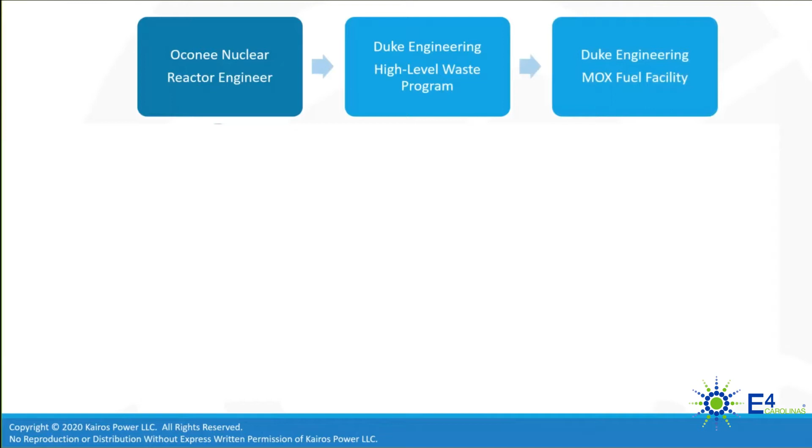Also within Duke Engineering, I then moved into another leadership position supporting the mixed oxide fuel fabrication facility back in Charlotte. Before being pulled back into the power company proper to do new plant development, I broadened beyond simply a Duke leadership role to an industry consortium as well, the NuStart consortium that was a collection of utilities working on jointly licensing the AP1000 and the ESBWR.

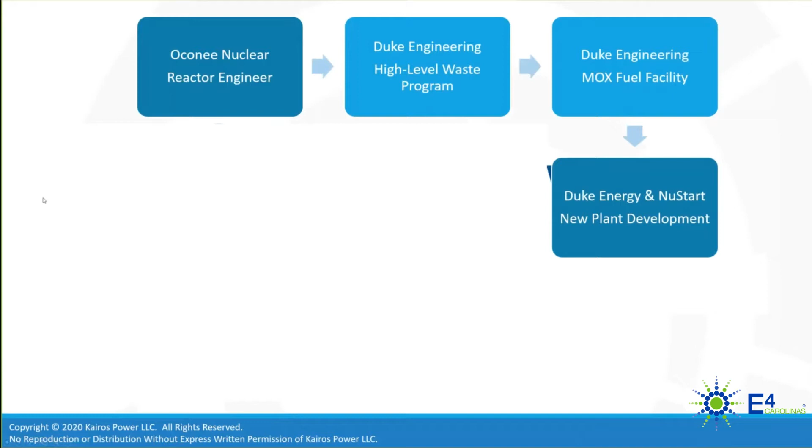After almost 30 years, I left Duke and joined Babcock & Wilcox on the mPower small modular reactor program. After B&W canceled that project, I spent 3 years in my own firm contracting with multiple advanced reactor interests. Happily, one of those clients made me an offer I couldn't refuse, and here I am.

As I reflect on my path, I look back on the combination of events that got me where I am. There were certainly components of being at the right place at the right time. Certainly there were components of being willing to stretch beyond what might have been my obvious capabilities, obvious either to myself or to others or both. And the willingness to step into leadership roles in partnership, consortium, or industry forums.

As those who have been in those sort of industry forums can attest to, there's a lot of value to just being willing to speak up, especially in a room full of people when otherwise things might be quiet on critical issues.

So on to the main presentation content. Kairos Power is a privately funded company focused on the commercialization of the fluoride salt-cooled high-temperature reactor, or FHR. We'll talk about our technology in a moment. We were founded in the San Francisco Bay Area in 2016, emerging from a concept developed at UC Berkeley with cooperation from MIT, University of Wisconsin at Madison, and the Department of Energy's Integrated Research Program.

We're currently at about 140 full-time employees, most of whom work out of our Alameda, California headquarters that you see pictured here, with a handful in the Charlotte office and a few in our new and growing Albuquerque location. Our development schedule is driven by an expectation of US demonstration by 2030 or earlier, with an emphasis on earlier, and rapid deployment ramp in the 2030s.

Our design is a bit of a hybrid. So we combine the use of TRISO fuel, which is historically used in high temperature gas reactors, with molten salt coolant, borrowed from the molten salt reactor designs, but distinct from them in that our fuel is not dissolved in the coolant. We're actually unique in having molten salt as a coolant, but a solid TRISO fuel. And not pictured here, but borrowed from sodium fast reactor technology, is a low pressure primary system.

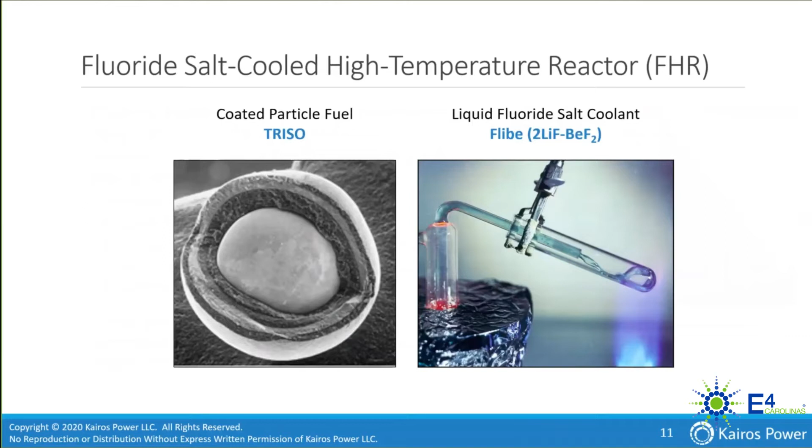Our commercialization target relies on competing with natural gas. We recognize we will have to do things differently, as do all new nuclear developers today. We start that by taking advantage of robust inherent safety that includes substantial fuel temperature margins as a result of the very robust TRISO fuel, retention of fission products in the fuel and in the coolant. One of the important aspects of the molten salt coolant is it has a very high affinity for hanging on to radionuclides.

So the fuel form that we use is remarkably robust. It's been tested to temperatures in excess of 1500 degrees centigrade. So there are hundreds of degrees of margin against any projected accident scenario.

In the unlikely event of release of significant radionuclide content from the fuel itself, we take advantage of that high affinity on the part of the molten salt to grab onto those radioisotopes and to hang on to them. And as I mentioned earlier, a low pressure primary system that limits the volatilization component of a hypothetical accident scenario.

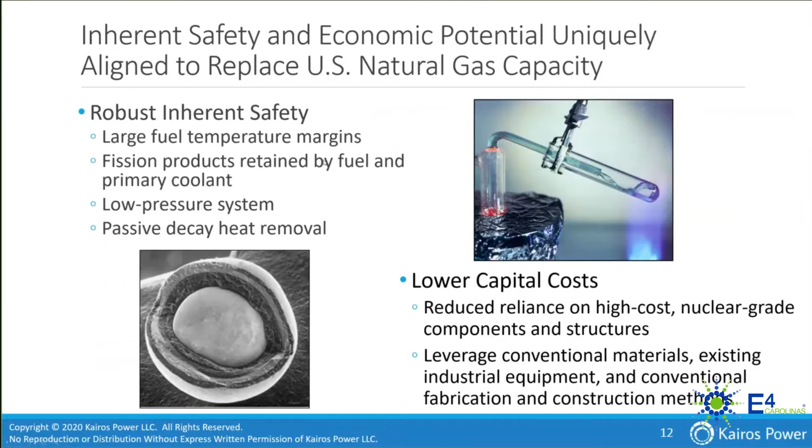Another innovation on the part of Kairos Power is to challenge the conventional development cycle with more iterative development that incorporates the concept of rapid development and testing cycles, often testing to failure as part of prototype development. I'll show you a picture at the end of the presentation that's actually one of our labs where most of our design engineers are co-located with a lab facility. And when it comes time to conceptualize a component, more often than not, they simply go into the lab and build what they're designing in real time to see if it will work.

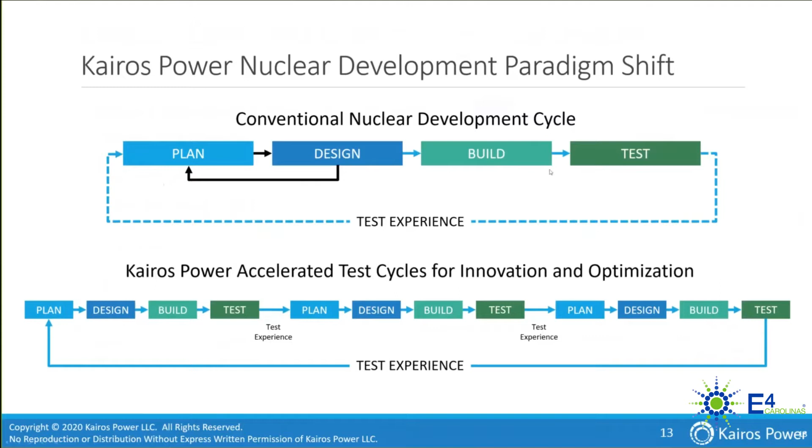I meant to mention at the time, it's a repurposed World War II era hangar on the former Alameda Naval Air Station, which is being repurposed for several industrial and residential purposes. It is a singularly impressive facility. If you ever get the chance to see it, you should definitely go do that. It's roughly 50 or 60,000 square feet of laboratory and office space, and it's a really, really slick place to visit.

The second is the Salt Lab, which is intended to handle molten salt at temperature. The S Lab is also co-located with the Alameda headquarters facility, and it is being completed and commissioned as we speak. We have managed to return a select number of people to work in our Alameda facility, and their primary focus, of course, while maintaining safe operations, is to get the S Lab commissioned.

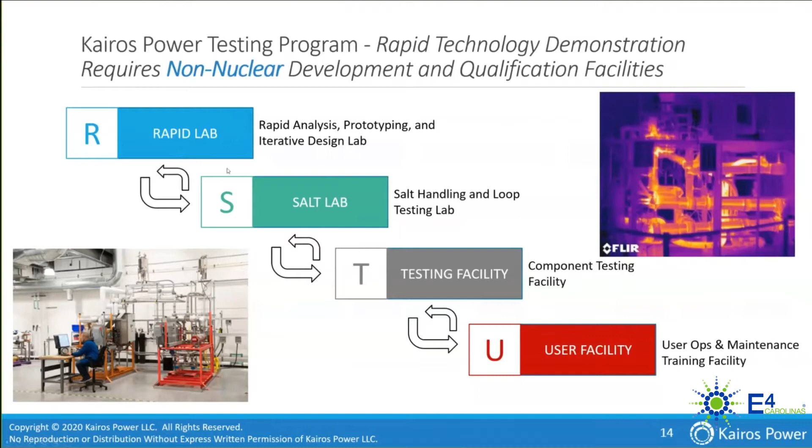In the past 2 years, in addition to commissioning the Rapid Lab and the Salt Lab, we've completed pre-conceptual design of the Kairos reactor and are well underway on conceptual design. We're also in the midst of detailed design for the engineering test unit that I mentioned a moment ago. I run the East Coast office in Charlotte, and I'm happy to report we just announced the formation of a strategic collaboration with Materion Corporation to develop a reliable and cost-effective supply of salt coolant for high-temperature molten salt reactors.

This coolant that we talked about a moment ago is a key component of the Kairos Power design, and under the agreement with Materion, they will supply beryllium fluoride, as well as expert technical consultation, key interfaces, and support services, and we're really happy to be working with them.

Also, I mentioned the new Albuquerque facility for the location of the engineering test unit and the T facility. We took over that facility. It's an existing building that we'll be upfitting, as well as adding some additional facilities ourselves. Just a few months ago, that announcement was made right at the end of the last calendar year.

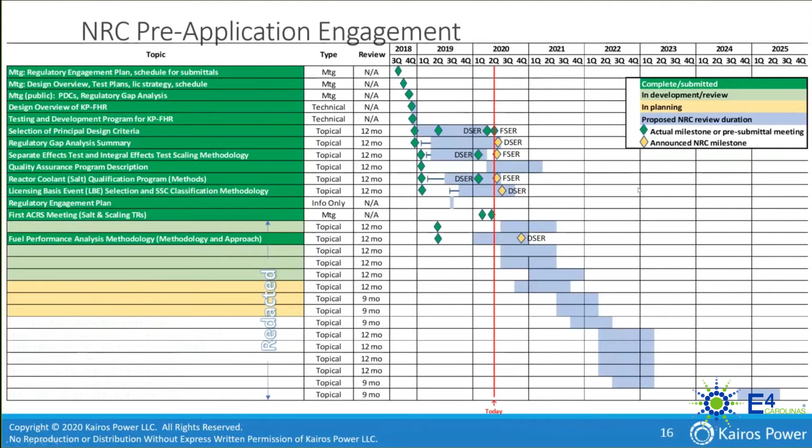So for those that aren't well versed in the work that's been underway in advanced reactor development in the past couple of years, I want to touch on some additional reasons for optimism. Small modular reactors have the potential to change the way nuclear energy is deployed in this country. Passive safety, which is pretty much the price of admission to new reactor development these days, changes the paradigm about what's considered important to safety.

Extended accident progression times, which I mentioned earlier, similarly have the potential to help change the outcome in our insistence on focusing on worst case scenarios. That is, what we think of as worst case is now changing and becoming more realistic and becoming more focused on the actual design as opposed to some prescriptive imposed set of accidents.

The design-specific review standards were an effort by the NRC staff a few years ago to take that guidance that was historically applied to all reactors and make them design specific to try to benefit from what the staff knows early in the review process about the design. While it wasn't completely successful, it did signal a willingness on the part of the NRC staff to begin thinking differently.

Functional containment offers an opportunity to credit, in the case of the Kairos design, our fuel and coolant, and obviate the need for a huge, monolithic, and very expensive pressure retaining containment. A site boundary emergency planning zone that recognizes when the risk of the facility is low, another signal that acknowledges when a plant design reduces real and perceived risk to the public.

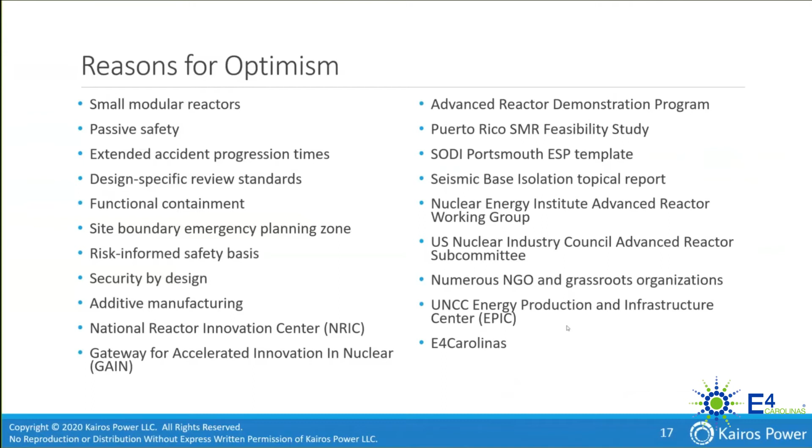Nuclear energy, under any objective metric, is the safest form of energy production ever. Even factoring in accidents such as Chernobyl, nuclear is safer than any other technology and is available very close to 100% of the time. And nuclear is required by law, by the way, to manage its own waste in a way that's virtually unmatched by other technologies. Nuclear is expensive to build and cheap to operate.

Large plants are virtually impossible for many markets today because they're so capital intensive, which is why Kairos Power and many other advanced reactor developers see it as a moral imperative, frankly, to change that equation. And let's be clear, energy poverty is worse for the poor, at least in the short term, than climate change. The UN, for example, lists universal access to clean energy among its top 10 priorities, arguing for transition to renewable

energy in poor countries. The Breakthrough Institute argues, on the other hand, that small-scale renewable projects to supply small amounts of electricity to subsistence farmers is not effective as anything more than a stopgap because it can't address energy poverty at scale. They say, quote, "There's no nation on earth with universal electricity access that remains primarily agrarian.